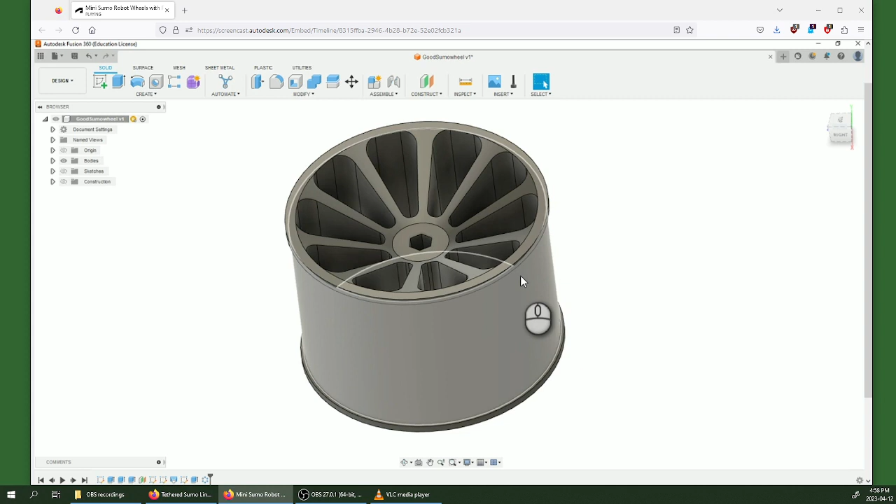Hey everybody, today I'm going to show you how to make a wheel for the mini tethered Sumo robot using Fusion 360. This tutorial involves making some simple sketches and extrusions. We're going to put a little lip on here so we can hold in the rubber elastics we'll use to add traction to these wheels. We're also going to add some spokes to take weight off the wheel and minimize the amount of material we're using.

So I'm going to try to replicate this in a new file. I'll start making a new design here, and this is probably the screen you're going to see to begin with, just a blank white screen because we've got nothing to work with yet.

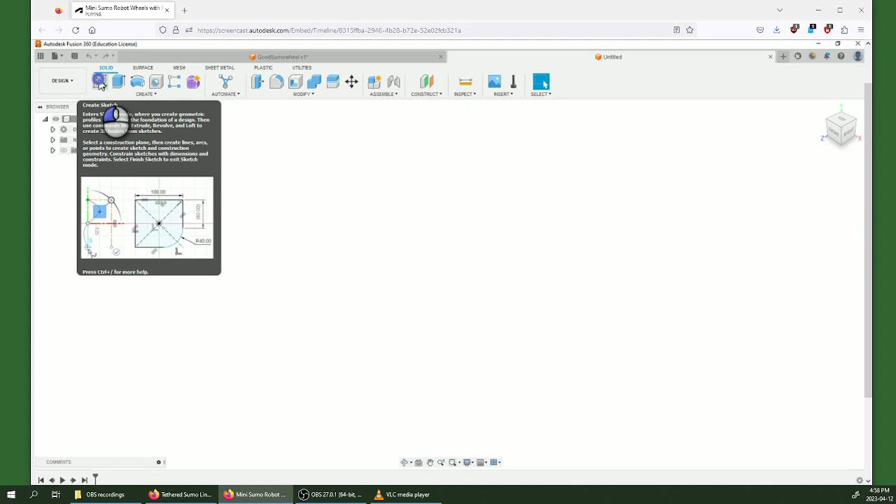So I'm going to start with making a sketch, and I'll make this sketch on the top plane here. You should be looking at the top part of the nav cube up here. To begin with, I'm going to use this origin point as the center for everything, because this wheel is going to revolve all around this center point.

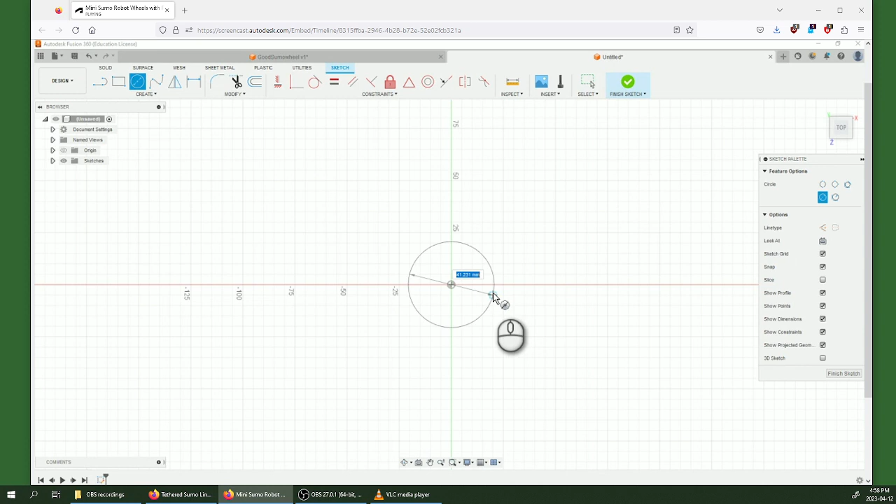I'm going to start by making one circle. I want my wheels to be 36 millimeters wide, so I'll type in 36 millimeters to set that size, because I want that one to stay 36 millimeters.

I'm going to add one more circle here, and you'll see the purpose of this one later. I'm going to make this one 37 millimeters, just a little bit bigger, and it's going to come out to right there.

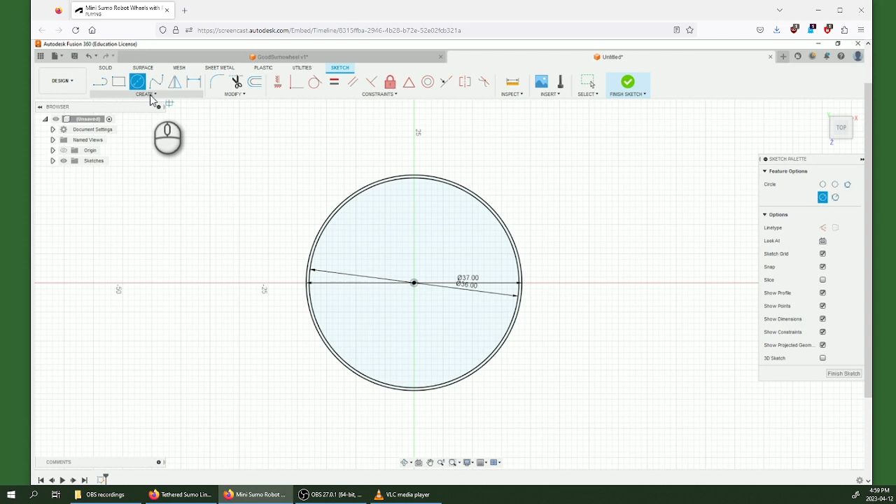Before I finish this sketch, all three big pieces of geometry for this wheel are going to be made on this first sketch. What I want to do next is make the hex piece that the shaft is going to fit into.

To do this, there is no hexagon tool, so we need to make a polygon ourselves. I'm going to use a circumscribed polygon, the first option.

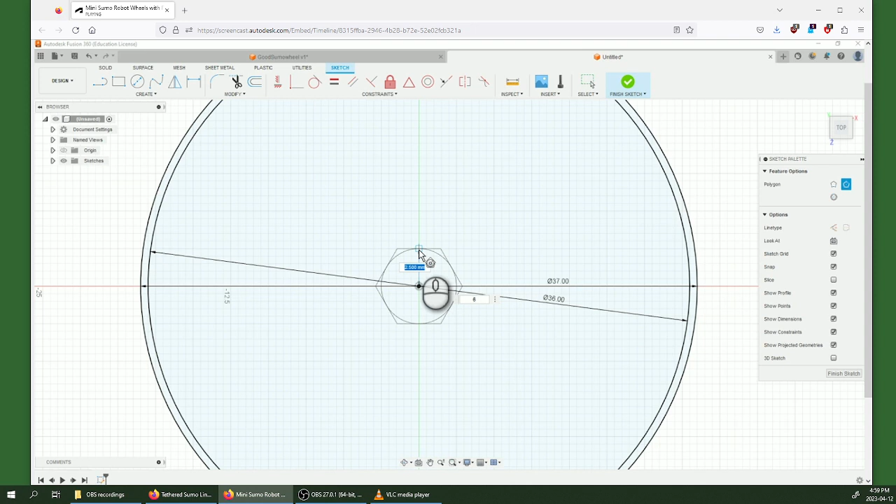Same thing here, I'm going to zoom in and click in the middle so this comes out from the center point. Off camera, I've measured what the size of this hex piece is.

It's about 2.8 millimeters. So I'm going to make this piece a little bit bigger, because when you 3D print small holes like this, the holes end up being smaller than you intend them to be. If you look closely, the arrow where the dimension's coming from is measuring from the middle, which means the radius is only half the total dimension that I measured on the piece.

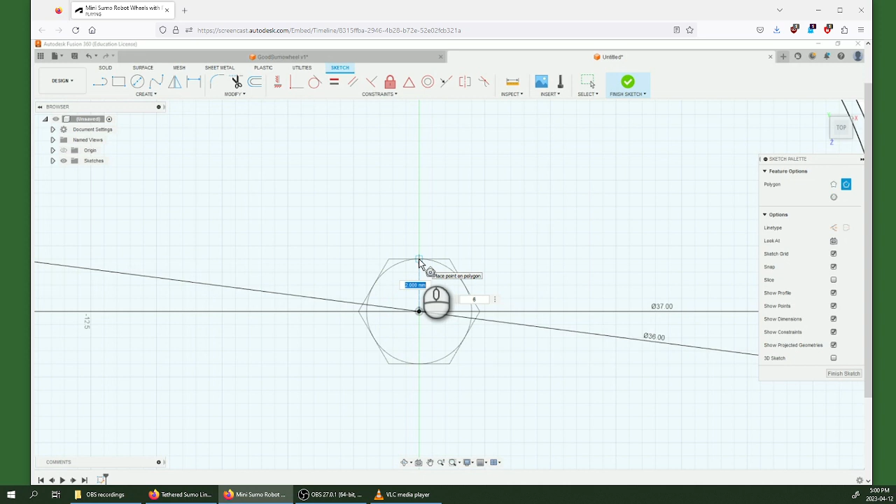So I want this radius to be exactly 1.5 millimeters, and I want to have 6 sides to this polygon. If you don't have that, you can hit Tab to put the 6 sides in there. I want it to snap nice and tight like that.

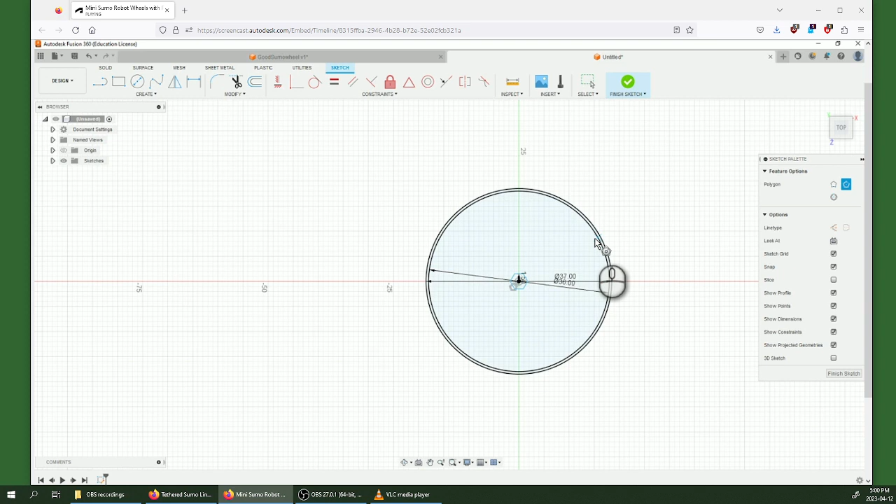That looks good. Okay, let's zoom back out again. It should look something like this: you have one little hex in the middle and 2 circles on the outside. Now that these have been set, I'm going to finish this sketch.

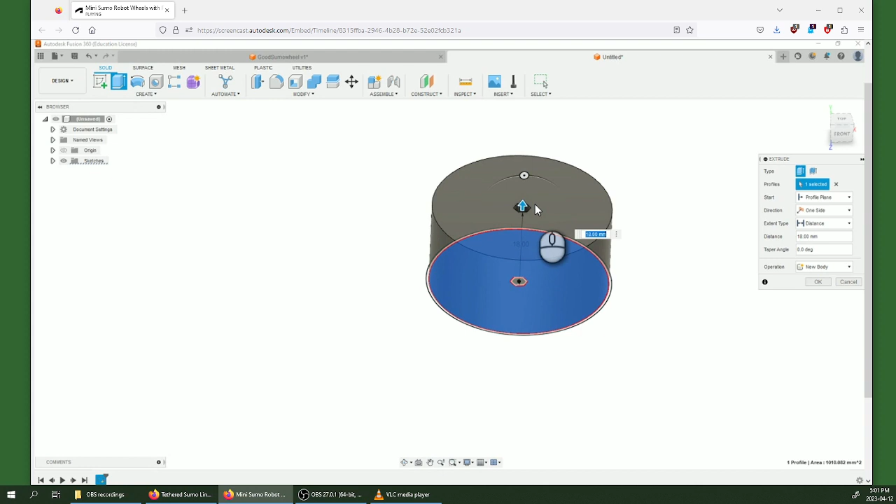I'm going to start extruding the pieces out to make this piece 3D. The first thing I'm going to do is extrude this big middle part here. You can either type in this dimension or grab the arrow and pull it up. I want this to be about 1 inch wide, which is 25 millimeters or so, so I'll type in that number and press enter. And here we've got the start of our wheel.

If I get confused while rotating around and can't figure out which way's up, I'm just going to hit the home button to make sure I'm back looking at it from the original view.

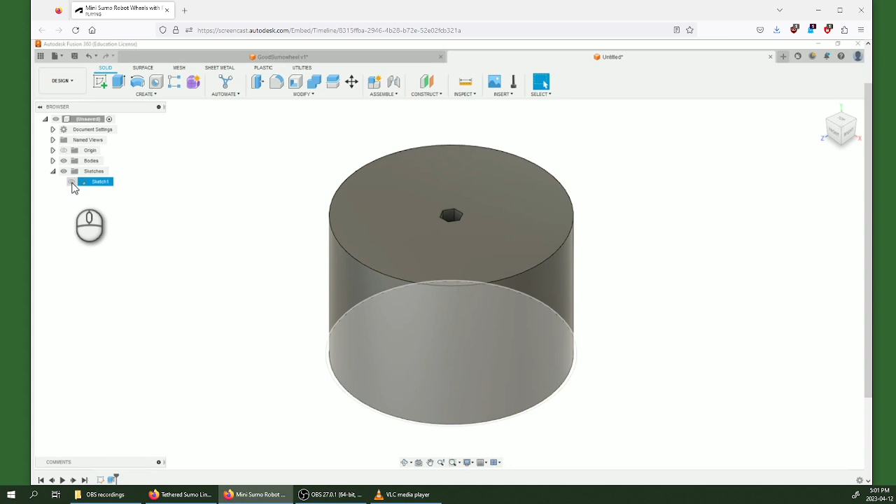Now I want to use the other circle that was on that original sketch, but it's disappeared, because once you extrude something, it assumes you've done everything you need with that sketch, so it becomes invisible. You see the little eyeball sign here with the cross through it, so I'm going to make this visible again by turning it back on.

And I'm going to make the rims now for this wheel, so I'm going to make 2 more extrusions here.

This first one is going to be just by clicking this tiny profile, and I want to raise it just 1 millimeter. You can click and drag, or type in the number. It doesn't really matter. Hit enter.

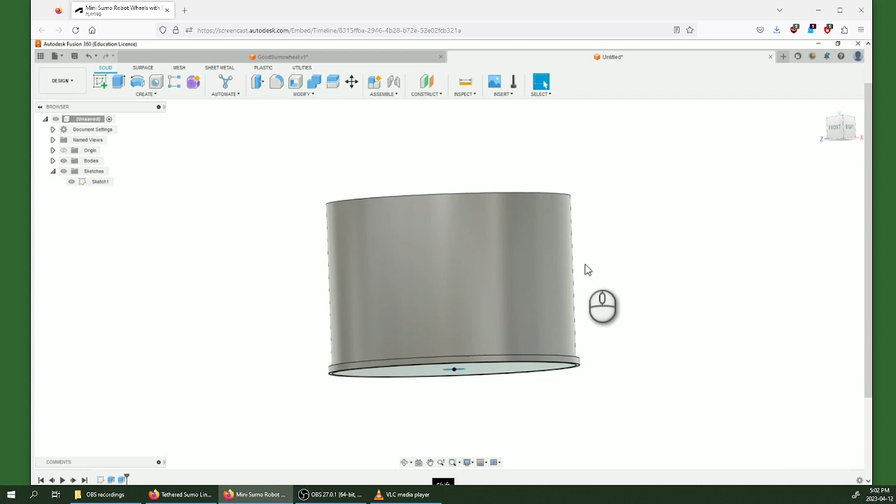Now, because I've turned the visibility of sketch 1 on manually, it's going to stay there. I need to use that sketch again, and I want to put this up on the top. There's a number of ways you could do this, you could mirror it, but what I'm going to do is just an offset extrusion.

So I'm going to make an extrusion. I want to extrude that profile there, except this time I don't want to start on the profile plane that we sketched it on. I want this to start offset from that profile plane.

So I'm just going to grab this arrow and drag this offset up until it's in line with the top, which... oh, I did it wrong. Hold on a second, I was doing the distance. I want to do the offset. I want this to be 25 millimeters from the bottom, so this should be sitting right on the top surface here.

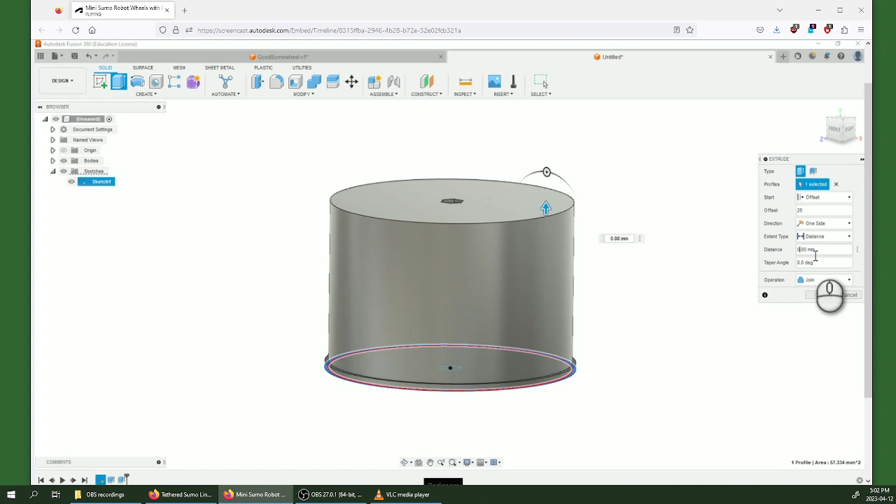And what that means is I want the distance of this extrusion to be 1 millimeter. Except if it's 1 millimeter, it's going to go up from the top, so I'm actually just going to go -1 millimeter. That will extrude that from the top down, and it's going to make sure it joins so that it's adding to the other piece.

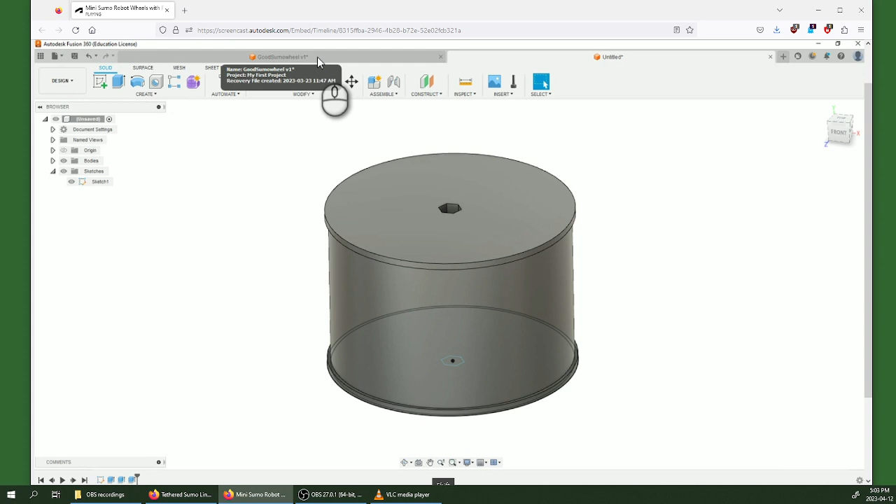All right, so now we've got our 2 rims on here, looking good. I'm just going to go back to my original drawing here for a second and show you this. I've done a bit of a, I don't know what you'd call it, a taper on the wheel just to make it look a little cooler. So I'm going to show you how to do this one here too.

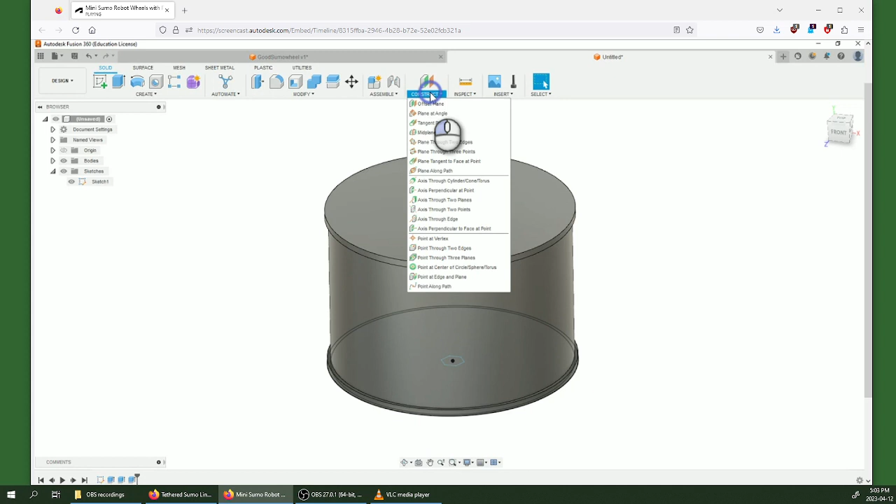What I did is I used a loft for this. To begin the loft, I need to make a circle inside this part in a place where we can't really see. We don't have any flat surface to sketch on, so I'm going to construct an offset plane. I want this offset plane to be offset from this top surface, going down, let's say, 6 millimeters from the top.

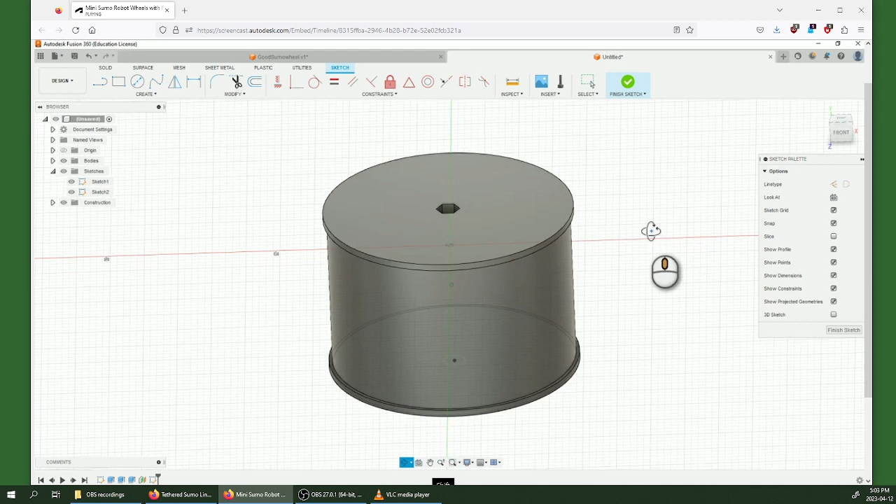Now, on that offset plane, I'm going to be creating a sketch. So now we're working sort of inside the part. You can see where the paper of the 2D sketch would be if you're drawing on paper. I want to make a simple circle from the center, and I want to make sure I get that center line, so I'm going to click the top, so I'm looking straight down on the top.

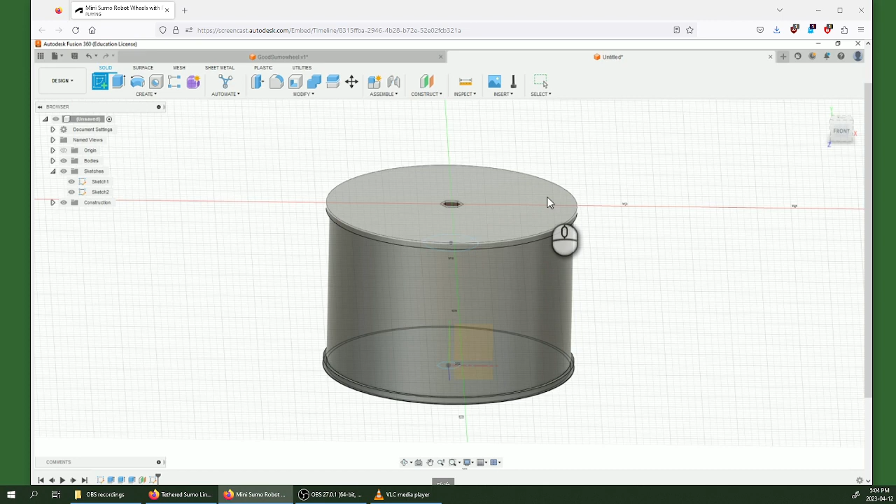From the center, I want to go out 8 millimeters. Okay, that's it for this sketch, I'm going to finish that one. Now I'm going to make a second sketch, this time on this top flat surface here, and let's make this one 34 millimeters. Okay, so now I've got these 2 circles. I'm going to finish this sketch as well.

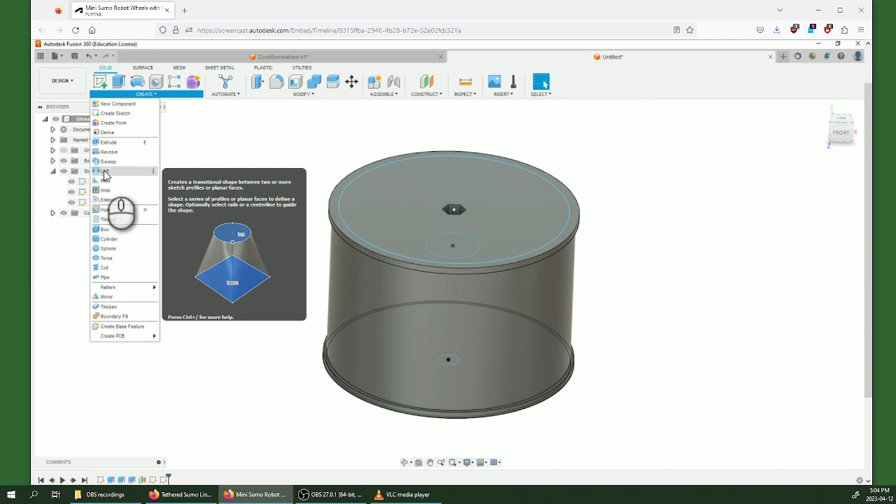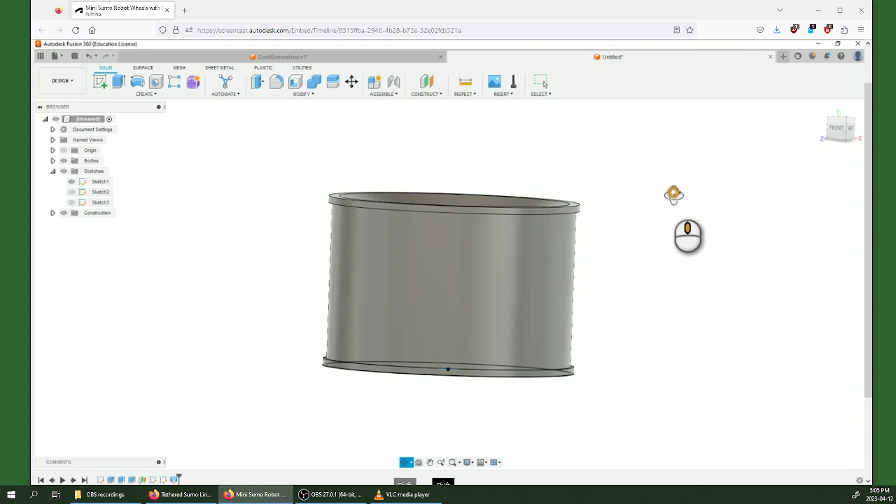So now what I'm going to do is go to Create, and you're going to see an option down here about halfway, a third of the way down, for a loft. What a loft does is it will take one shape, and it will take the second shape... can I get it? That one right there. It assumes because we're cutting through a solid surface to make this that I want to cut this whole operation out. And there we go, we've got our cool little cone shape now.

All right, so I'm going to keep building on this. I want to do these spokes. This is probably going to take the longest bit because I made some kind of fancy curves in here. So I want to make one more sketch, starting on the top surface here.

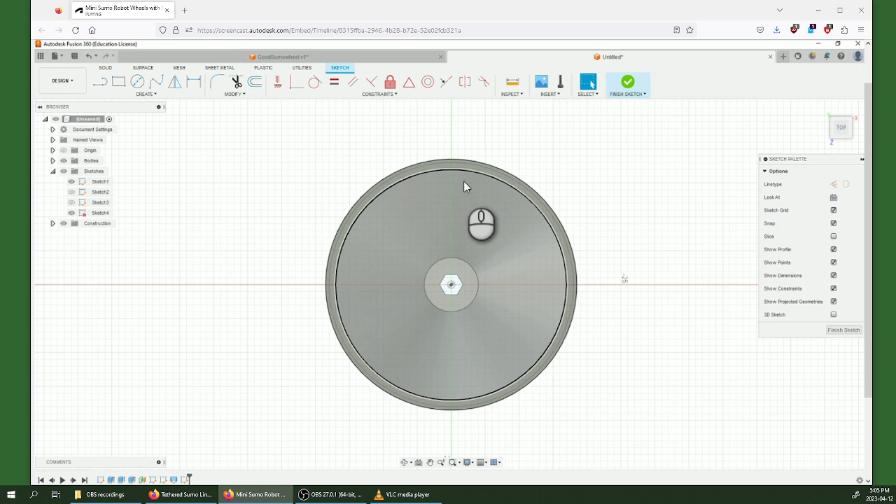I want to make something that's kind of like a wedge shape, so that by the time I make, say, 8 of these, they all kind of line up. So I'm just going to do this with some random lines to begin with. I'm going to start right on this green origin line here, and move over, let's say, 1 millimeter, and click to make a point. Now I'm going to move up, and this time what I want to do is actually set the angle.

You notice the blue dimension at 12.5 millimeters. I don't really care about the dimension, I want it to line up with this circle here. What I care about is that angle, because I want these to be even. So I'm going to make this one 105 degrees.

And it looks like it wants to snap to that circle, which is convenient. So I'm just going to click there. That looks good. And I'm just going to do the same over here on the other side.

You could use a mirror as well. I'm just going to type this in again, 105 degrees, and I'm typing it in to really make sure that it's set and constrained that way.

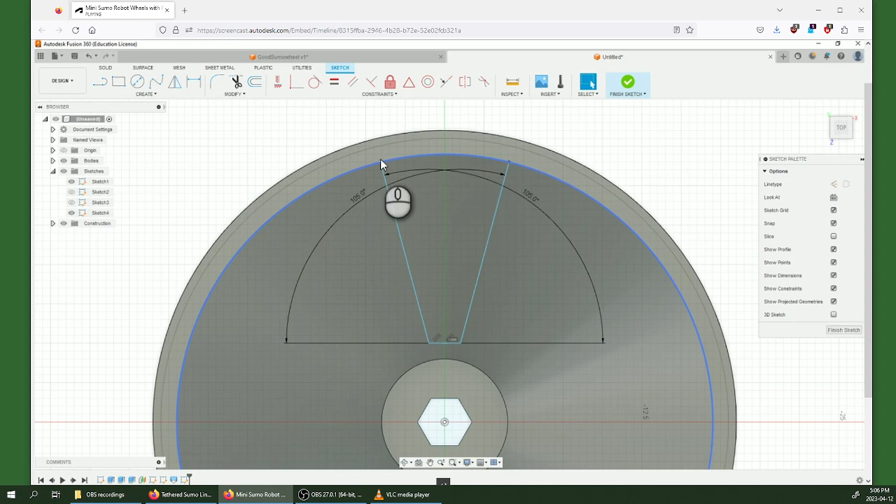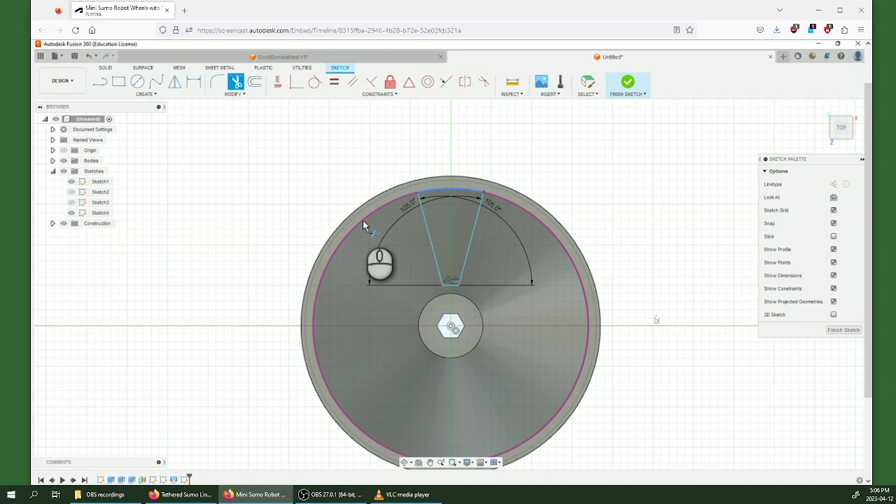Okay, now I just need one more curve from this point to complete the shape. So I'm just going to make one more circle starting from the middle because I know everything's concentric from the middle, and click on that point there. I don't really need this whole circle all the way around, so I'm going to use the trim tool and delete the rest of that circle around so that all we have is these 4 lines here.

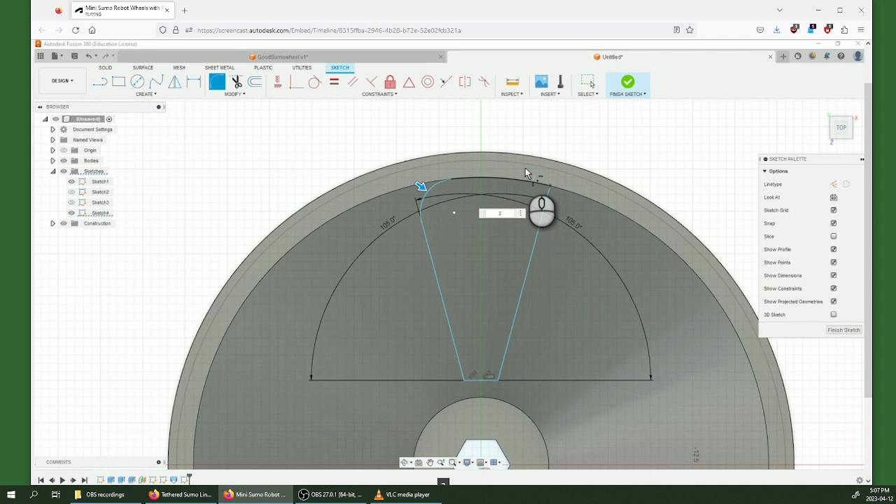Now, before I finish the sketch, what I want to do is add a little round corner into each of these corners. It's called a fillet. So I'm going to click on this corner here, maybe 2 millimeters, not 3. That looks a little better. And this one here, okay.

I'm going to make 2 more fillets down here just to make these look a little nicer. Let's make this 1 millimeter, and let's make that one 1 millimeter. And we got these nice kind of rounded corners everywhere.

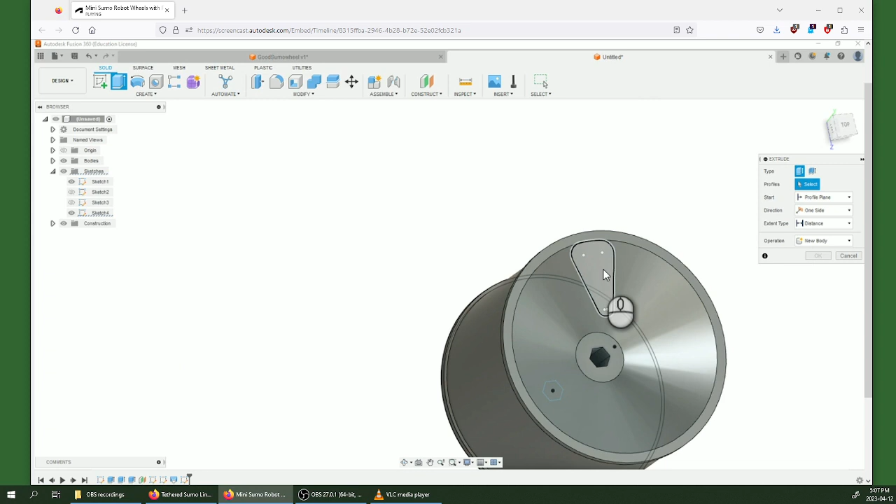Okay, beautiful. Now I want to use this pizza wedge to cut this piece away. So I'm going to select this profile. And instead of going a certain distance, what I'm going to do is just go to the bottom plane.

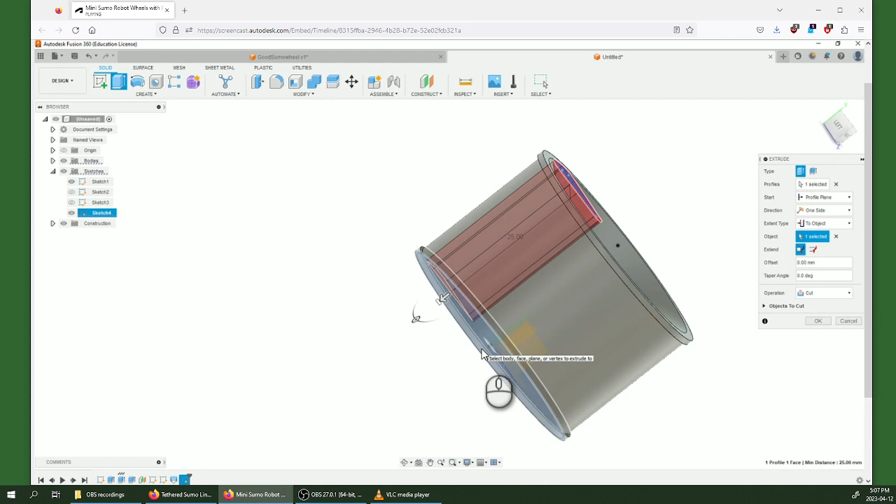The difference here is maybe later on I've figured out that my wheel isn't wide enough, or it's too wide, or whatever. If I say that I want this extrusion to go to the bottom, it will always snap to that bottom piece. If I give it a number, it's always going to go that number. So if I type in 25 millimeters wide, but then I actually make the wheel 30 millimeters wide, it won't come all the way through once I make that edit.

So here we have our one extrusion. I think that looks pretty good. Now I want to do this again 6 or 8 or 10 times or something like that, but I don't want to actually do it manually that many times. So I am going to create a pattern now. This time we're going to make a circular pattern because we're going around the wheel.

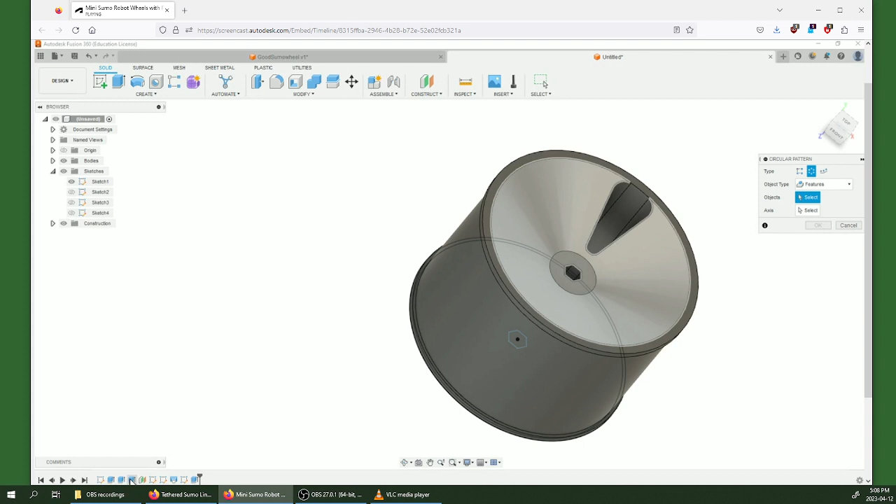The thing that I want to pattern is not a body, it's not a face, it's not a component. What I'm trying to do is make a feature get patterned. So the feature is going to be something that you can see in this history down here. You could just click on the piece as well, and it understands I want that entire extrusion to be selected, so that's nice and convenient. If you can't get that entire selection, you can always just click on this extrusion down here and everything is selected.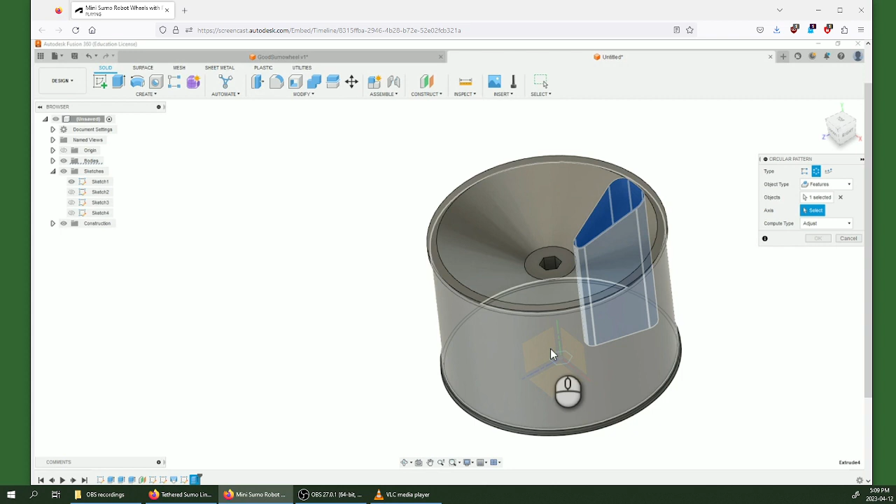The axis that I want to revolve it around is actually that little green line in the middle there, but that's pretty hard to click. Everything is concentric around that green line. Every other circle here was made on that origin point. So I'm just going to click any other round surface, and it understands that we want to revolve around the middle.

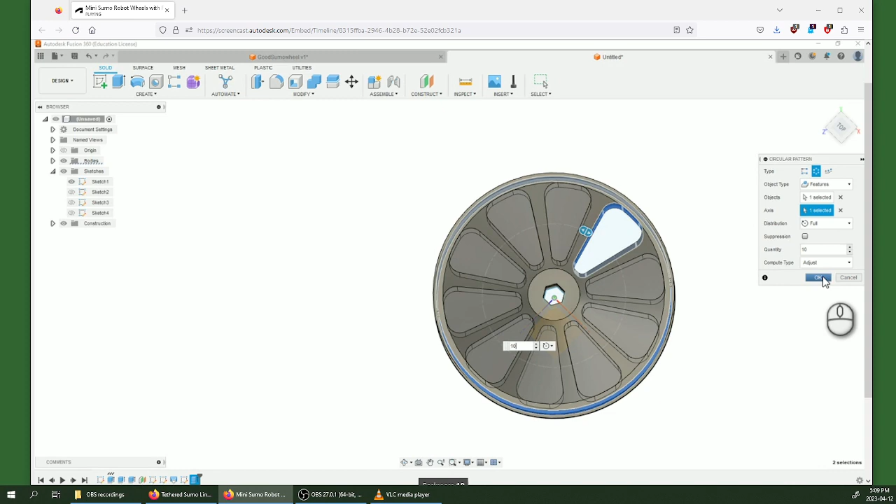Instead of making 3 of these, let's try 6. What does 6 look like? Yeah, still kind of chunky. What does 8 look like? That's looking better. What about 10? Oh, I like that. We're going for 10 this time. All right.

So I think we've got it. At this point, feel free to modify anything that you need to. Add more fillets, more round corners in if you need to. But this is basically ready to print.